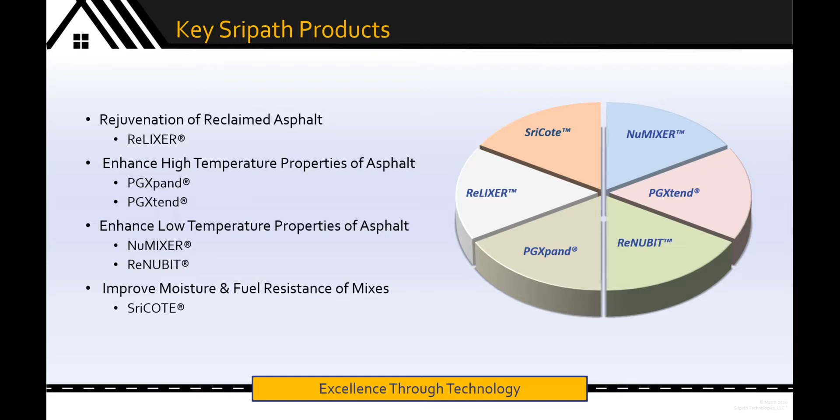Sripath Technologies develops, manufactures, and markets innovative additives to enhance the performance of bitumen for paving and roofing applications. We deliver excellence through technology. We focus on providing facile, versatile technical solutions for our customers worldwide. We are a responsible corporation and are focused on sustainable technologies. Sripath supplies a range of novel additives for paving and roofing applications, including rejuvenators, high-temperature polymers, low-temperature oils, and anti-strip agents.

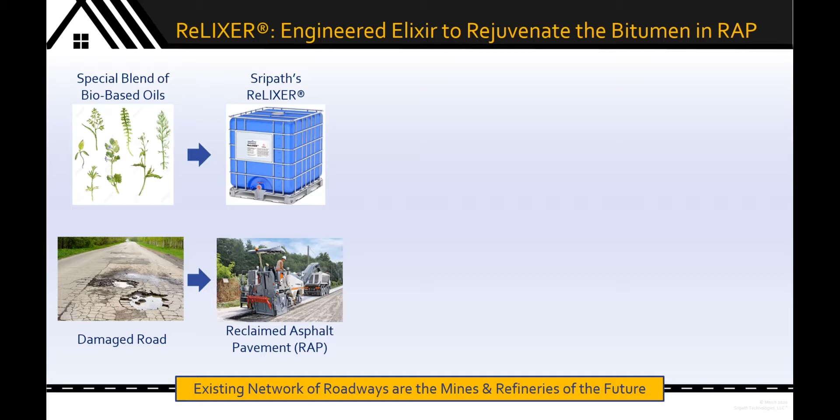Today, I'm going to focus on ReLIXER, an elixir to rejuvenate the bitumen in reclaimed asphalt pavement or RAP. ReLIXER is a specially formulated blend of renewable bio-based oils fortified with special additives to quickly penetrate and effectively rejuvenate the aged bitumen in RAP. ReLIXER rejuvenates RAP to create a reusable asphalt mix which can be laid down on a road either as a wear layer course or a base course. ReLIXER allows the use of 25 to 60% RAP in your mixes, and in some cases even 100% RAP.

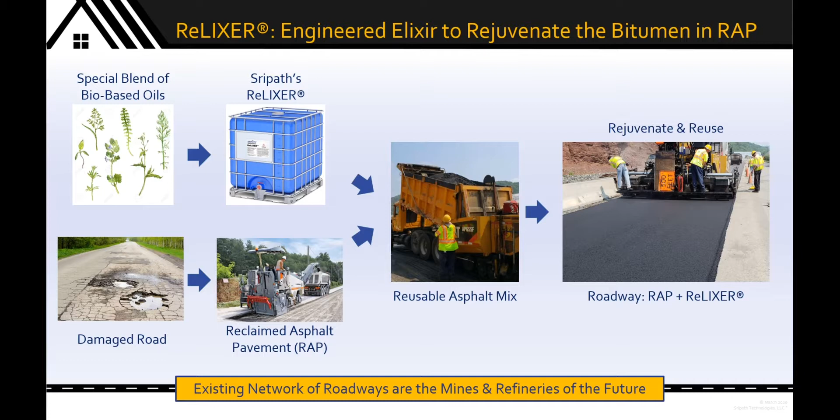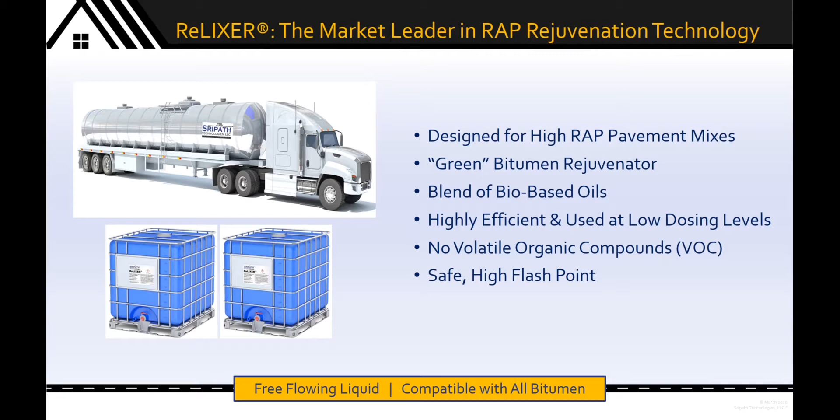ReLIXER is the market leader in rejuvenation technology. Sripath's ReLIXER is effective in high RAP mixes at low dosing levels. It is a green product composed of bio-oils. It's a free-flowing liquid under ambient conditions. It is compatible with a wide variety of bitumens around the world, has no VOCs, and is safe and has a very high flash point.

In this slide, I want to highlight the impact of ReLIXER on several high RAP mixes. In mix 1, 1A and 1B, both having about 45% recycled asphalt content, mix 1A has no ReLIXER, and mix 1B has 0.28% by weight of ReLIXER. Right away, you can see the improvement in low temperature grade from about -14 in the unrejuvenated case to about -22 in the rejuvenated case in mix 1B. And the viscosity is changed from 8,500 to a much more workable 3,000. And there are attendant changes in softening point and penetration.

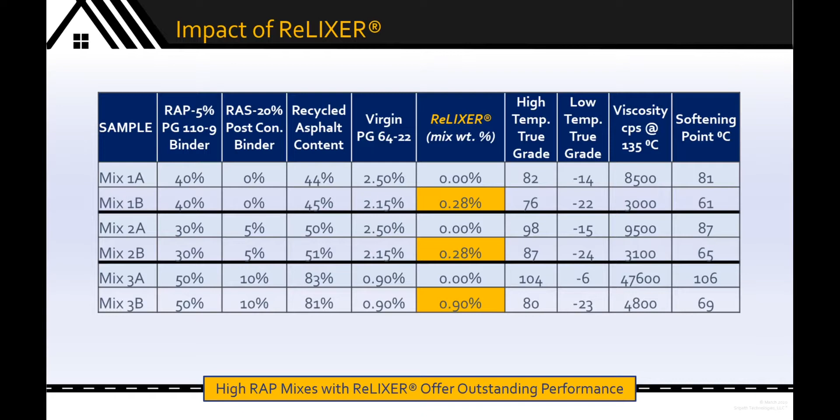As you step down sequentially from mix 1 to mix 2 to mix 3, you can see the increasing amount of recycled asphalt content in your mix from about 45% to about 81 to 83% in mix 3. Mix 3B, which has about 81% recycled asphalt content and 0.9% by weight of ReLIXER, you can see the dramatic influence on viscosity of the extracted mix from about 47,600 to a much more workable 4,800, a reduction of about 90% in the viscosity-related stiffness of that mix. You can also see the effects in the low temperature true grade, which changes from about -6 in the unrejuvenated case to about -23 in the rejuvenated case with ReLIXER.

Here we're looking at the durability of mixes, RAP mixes having ReLIXER. And you can see that with 30% RAP mixes with ReLIXER and 50% RAP mixes with ReLIXER, the performance is roughly comparable to that of mixes with no RAP. Here we're measuring IDEAL-CT, which is a measure of fracture toughness or crack resistance of the material.

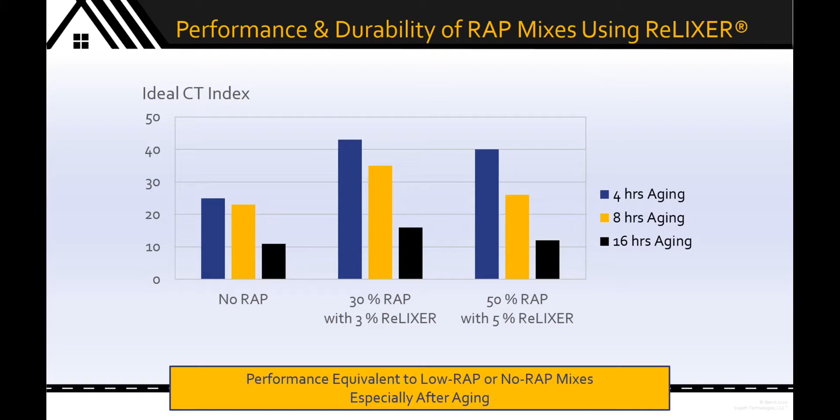And you can see that not only is the 4-hour aged, the as-processed and laid-down material properties of the IDEAL-CT quite comparable to that of the no RAP case for both the 30% and the 50%, but also the 16-hour oven-aged sample shows very comparable properties, the IDEAL-CT index, to the case with no RAP. It is possible to design with good rejuvenator and proper dosage recommendations. It is possible to design good mixes with high RAP content that are similar in performance to no RAP or low RAP mixes.

Sripath launched the development after extensive lab tests between 2011 and 2014. Sripath launched ReLIXER, first sales in 2015, first commercial roadways in 2015 in North America, followed shortly thereafter in 2018 in Asia, and soon in Europe and in the rest of the world. Trials are underway in several parts of the world.

ReLIXER helps reduce mix costs. ReLIXER rapidly penetrates into and rejuvenates the bitumen in RAP and forces more of the aged bitumen in the RAP to behave like a virgin bitumen, thereby substantially reducing the bitumen content of the mix. With ReLIXER, high RAP mixes can deliver anywhere from about 7 to about 15% of cost reduction over base mixes, depending on the amount of RAP used and the prevailing price index.

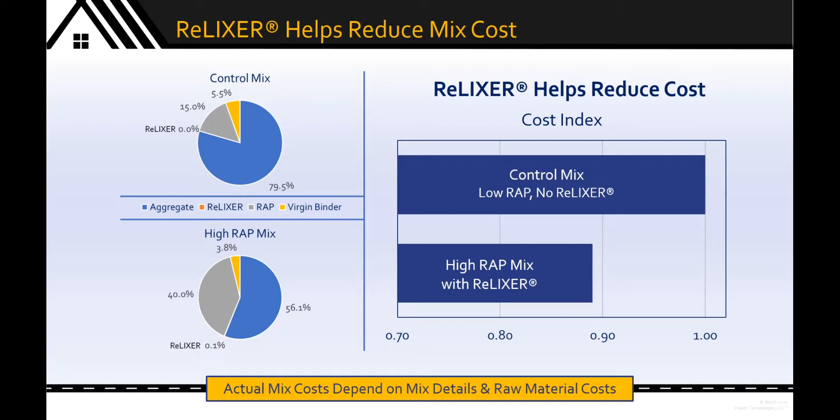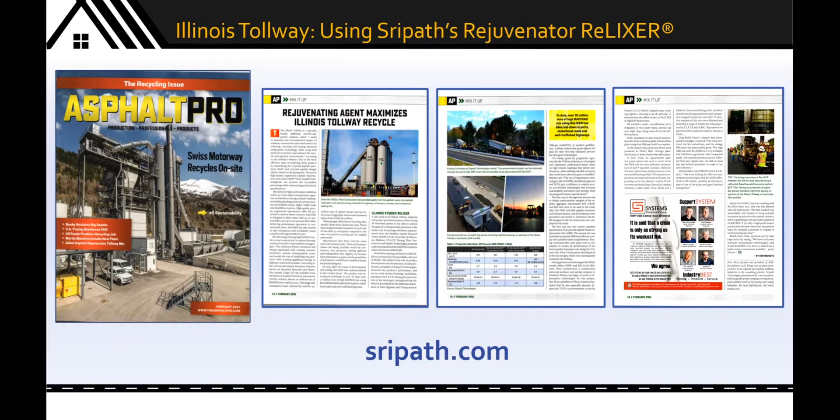ReLIXER is easy to incorporate into existing operations, and the resulting asphalt mix is smooth, well coated, and is easy to lay down. Sripath's ReLIXER has been qualified and is being used today on many roadways in USA, Canada, and Asia, with, as I mentioned, trials soon occurring in many different parts of the world.

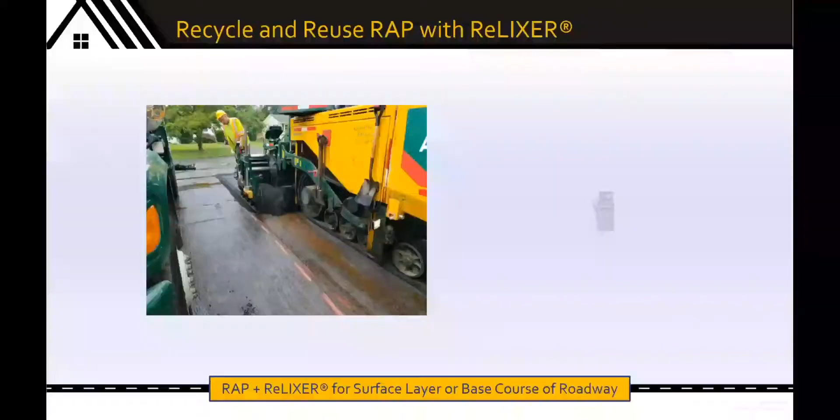ReLIXER can be introduced at many different points in your mix plant, either a batch plant, a pug mill, or a continuous drum operation. It can be treated directly to the RAP on the conveyor belt. It can be fed into the bitumen tank pre-dosed, or it could be fed into the bitumen line feeding into the mix drum or the pug mill using a static inline mixer. It has a very low viscosity under ambient conditions, and more importantly, a stable viscosity over a wide temperature range that allows for very many different introduction points in your plant operation.

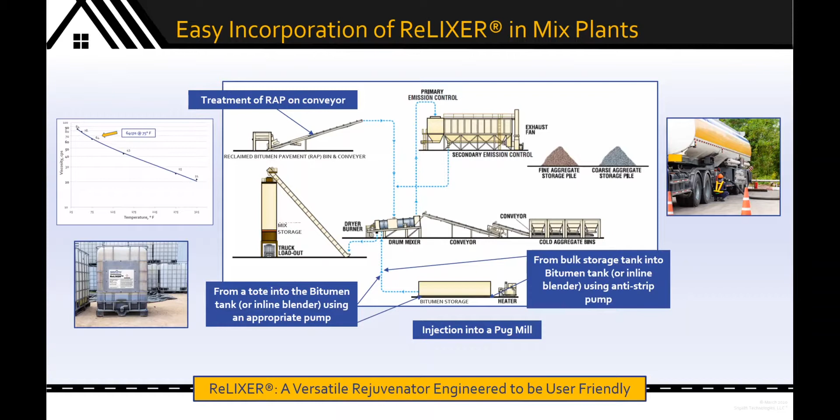ReLIXER is an innovative, environmentally friendly solution developed by the rejuvenation experts at Sripath Technologies. Sripath's ReLIXER product reduces dependence on virgin bitumen, it reduces dependence on fossil fuels, it reduces the need to mine for fresh aggregates, it reduces the amount of RAP destined for landfills, it reduces the energy consumption, and most importantly, it reduces the cost of the mix. It is tested, it is proven, it is used, and it is trusted around the globe. With ReLIXER, the existing network of roadways becomes the next generation of mines and refineries.